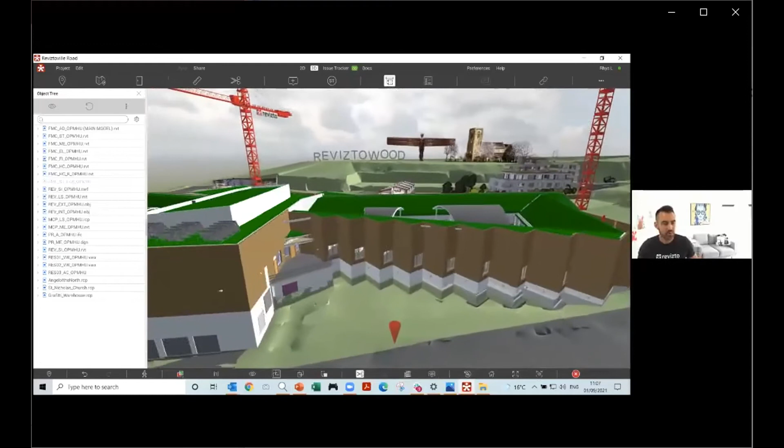So first things first, here's the Revizto application that's on my desktop, and we are also available on a variety of devices. So tablets of all sorts, everything you're seeing now we can take into VR, we can monitor all of the progress of issues or activities through a project via a web browser. 2 things that really stick out for me is interoperability and usability. Revizto really is that central hub to bring together a wide range of different file formats into an environment that you're comfortable in. So for me, it's important that we're able to bring together lots of different types of information, because that's what our clients are telling us.

On a certain project, they may have architects using Revit, and the engineers using Tekla or Civil 3D, IFC. We may have some point clouds if this is a project where we have some existing conditions that we need to take into account. And you can see here on the left-hand side, as I open up my object tree, the variety of different file formats that I have in here. So Lewis kindly created this project for me.

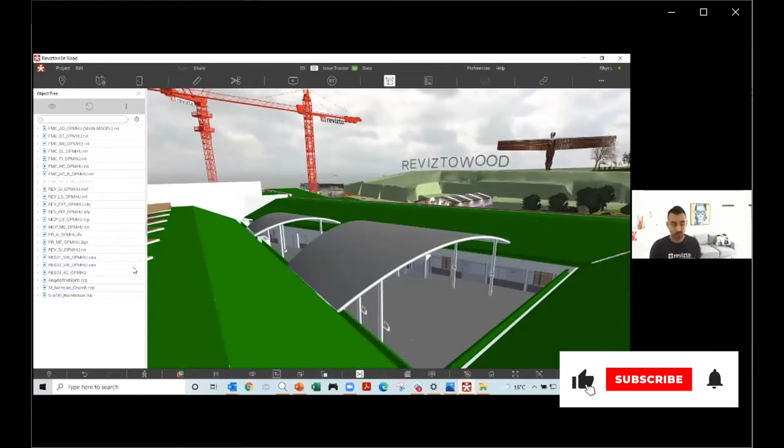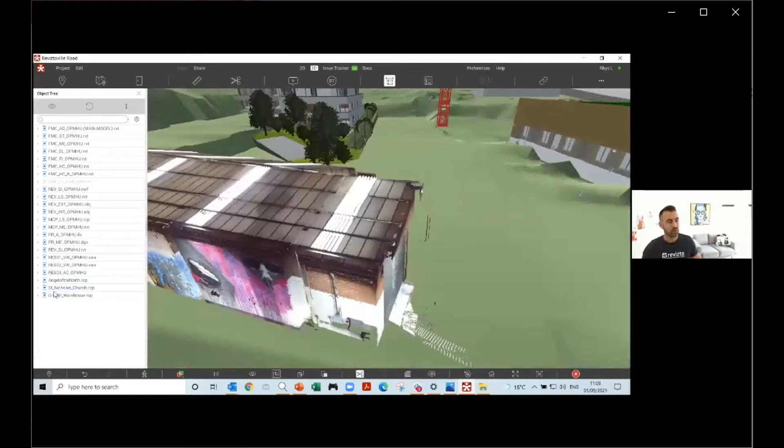So thankfully, I'm not going to have to jump into any of those technical tools today because I'm not comfortable using them. But using the gaming controls in Revizto, I can really quickly and easily start to navigate through this pretty large set of models here in no time at all. So it's about giving access to information that's not readily or usually available to everyone on a project in a rather unique way. So we can start to navigate through here.

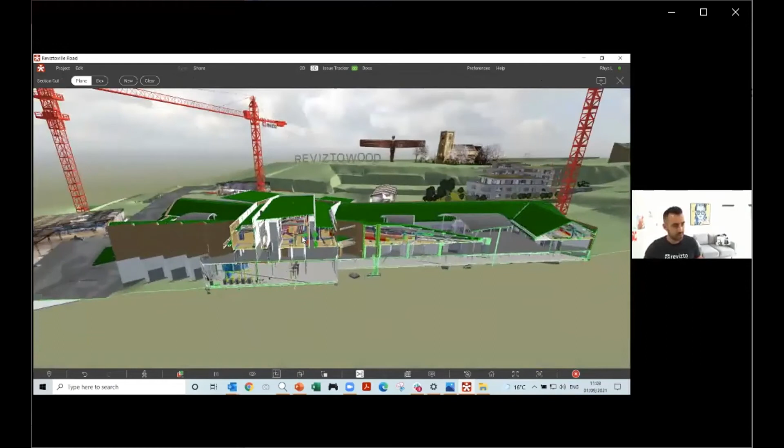Let's come back home, take measurements, cut sections. There's a variety of things that we can do here whilst we're in the project itself. So I'm going to take a section through this particular face, I can do that. I can jump down into this area and take a measurement should I want to. Let's just grab the ruler icon here, and that will open up my measuring tool. There's a variety of options. Actually, we'll just use the laser here.

And there's a number of reasons that I may want to do that. And in this 3D space, if I just hover over any object, you'll start to see that the metadata that's come through as part of the export is now available for me. If I double click, it'll give me all of the information about that particular object here.

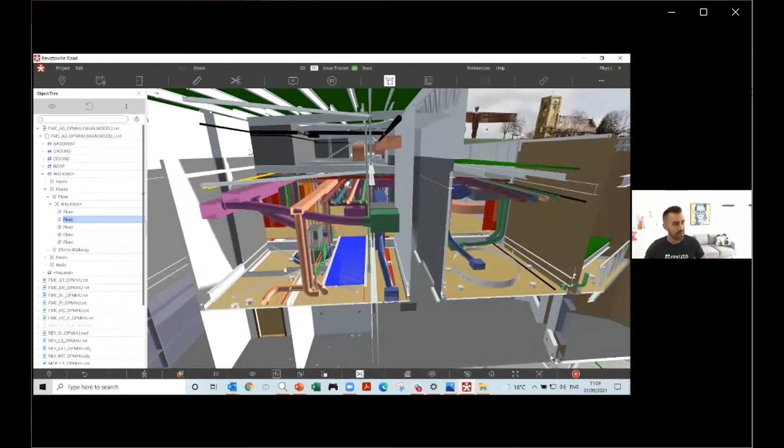So I can really understand what it is that I'm looking at, and then I can start to filter and search in a variety of different ways, now using the data, which is new to Revizto. If you saw our presentation last year, we could see this data, but we couldn't do anything with it. Lewis will touch on that a little bit more than I will. So we've got this space where we can look at all of this 3D information collectively.

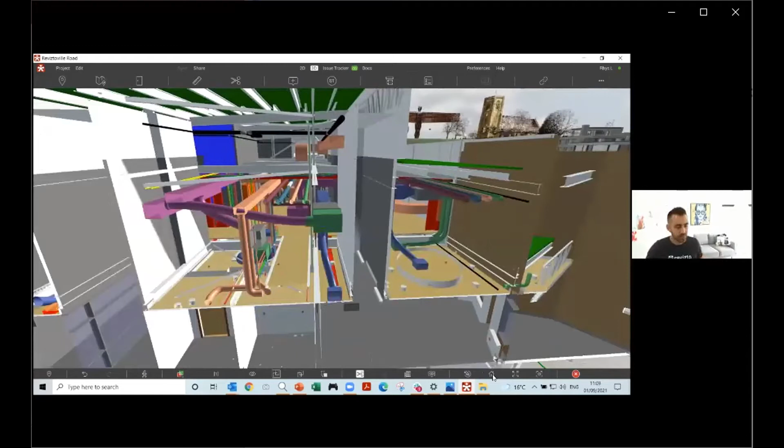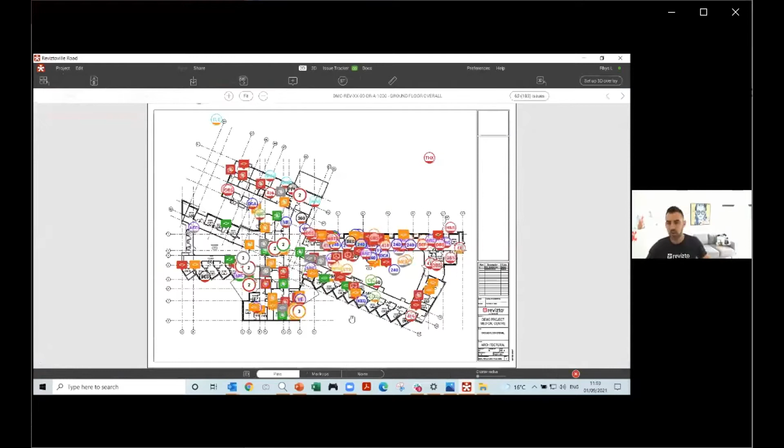What I want to do as well is just touch on the top here. If we take a look across the top, we're in 3D. We've got all of our 2D documentation as well. So here's a drawing with a live view of issues on this drawing sheet, color-coded by their status. So we've got drawing reviews on here. We've got clashes that have come through, questions from the client. All of these activities are now compiled into one place.

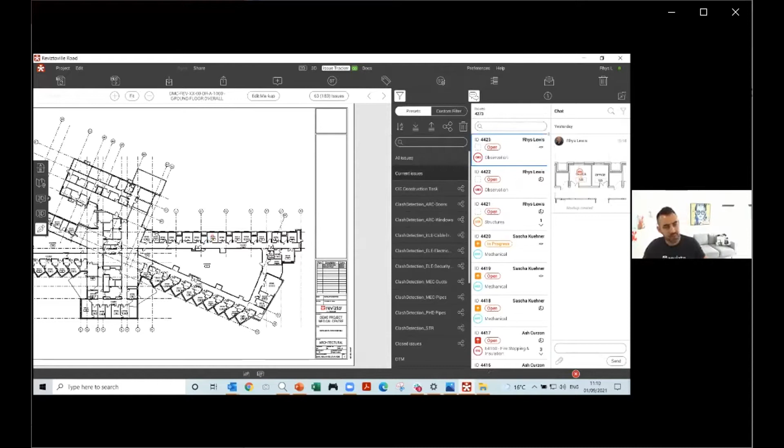This, our issue tracker, or as I like to refer to it, a single source of communication, a golden thread, that digital audit trail that so many of our clients previously were spending a long time trying to bring together, all of that information that's traditionally kept in project folders, various emails, PDF reports, BCF files, a wide variety that are not connected. Revizto really is the tool that can bring all of the project team together into one place so we can really understand what's going on, or more importantly, what's not going on.

So as I start to move down the issue tracker here, you can see there's a wide variety of varying issues here. This is me trying to be creative, but you can see they're all tracked, logged. We can see who the issues are assigned to, what they are, where they are, and all of this information is linked back to the authoring tool. So that's just a very quick top overview of the application itself.

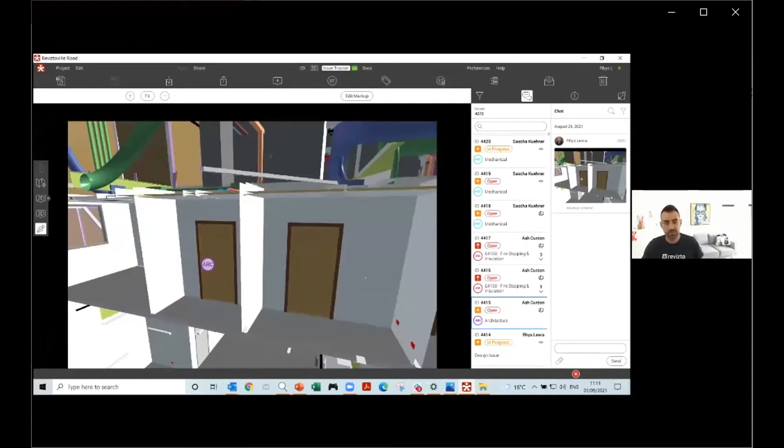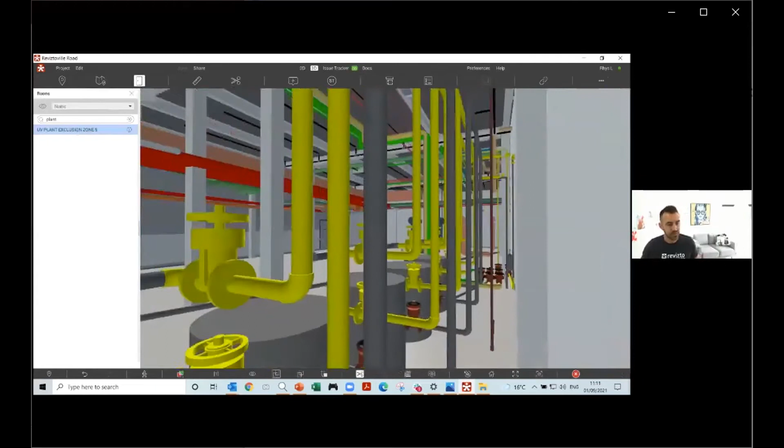What I want to do now is start creating some issues. So we'll come back to 3D and we'll jump to, let's go to a room. So I'm going to select the door icon there. Let's take a look in the plant room. So that's now going to take me directly to the center of that room. Again, using my gaming controls, I can start to navigate through into the center of that room. If I select the i icon, again, it'll give me all of the metadata about that room as well, should I want to do anything with that.

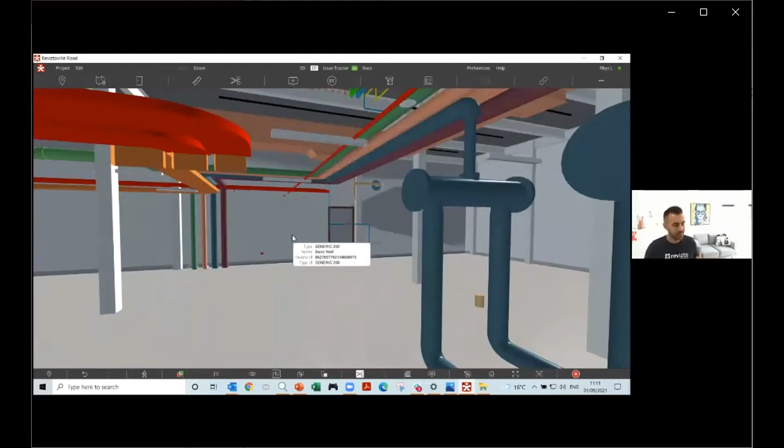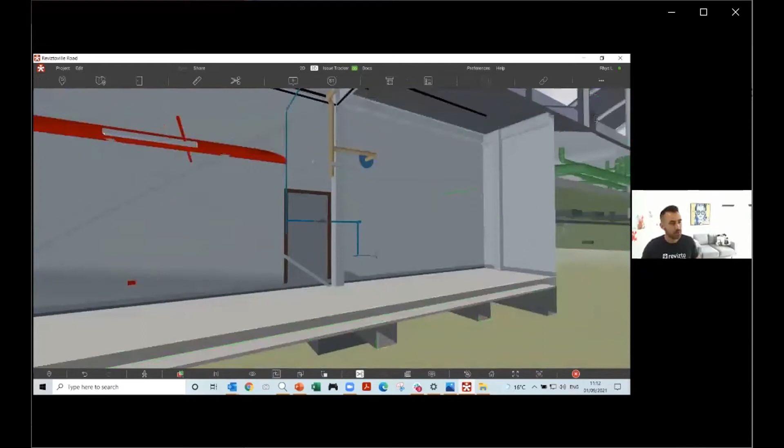Now, I've been in this room a couple of times, and I know there are a couple of things that need to be resolved. I've got my BIM wings on, shall we say, today, so I'm in fly mode. What I want to do is just slow the navigation down a little bit. So I'm going to click on this walk in person, and you'll see that slows things down quite a lot. I'm going to take my section tool, cut a section plane against this wall. There's clearly a problem here with this particular design. We need to move this pipe in. So what I'm going to do is create an issue.

Again, if you watched the session last year, you may remember that we just introduced stamps, talking about collaboration where you're comfortable. What we really want to do is help organizations speak a common language when it comes to issue creation or activity tracking. And the stamps really help us uniform that approach. So they're predefined issues effectively. And again, there's been a variety set up here. So we're seeing stamps being used for BIM coordination, construction review, design review, in the operational phase as well now, site reporting for snagging and defects.

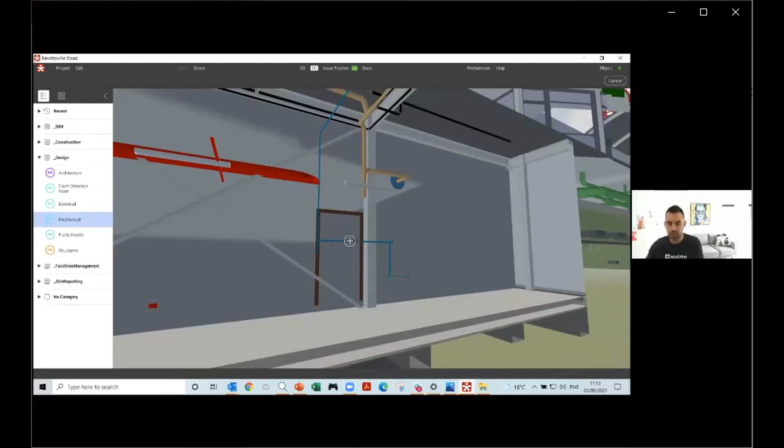So in design here, you can see we've got some predefined stamps for the different designers. I've got one here that's mechanical. So all I'm going to do is pick and place that stamp, and that now has been logged automatically in the issue tracker. So all of these fields here have been completed for me automatically. Just think about how you do this process today. If you are taking a screenshot, sending an email, marking things up and putting that into Excel, just think about how much time that's going to save your project delivery team.

And it's a single click for whatever type of issue that we want to create. So there's no confusion now if we're creating issues in a 2D space, in a 3D space, on my tablet or my desktop, the approach of creating, tracking and managing issues is the same for all. So we're all comfortable with how this should be done and that we're doing it in the correct way.

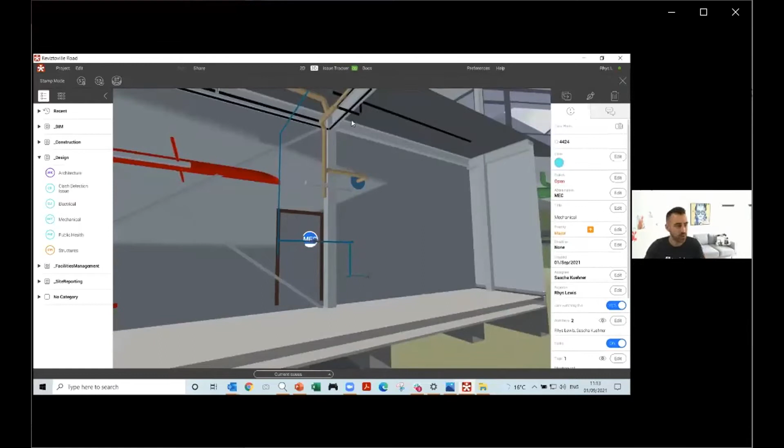Now, all of these fields here as well are being reported on, and I'll touch on that shortly. I just want to explain a little bit more about the issue itself here, first of all. So our issue tracker is based on the project's coordinate system, which means a lot. If I click on 3D here, the pen icon firstly is showing me the issue at the point of time that it was created. If I click on 3D, it'll show me where that issue is in the federated 3D view.

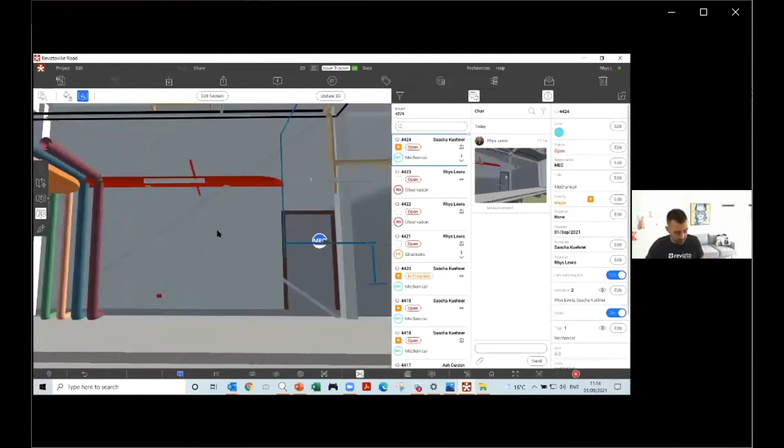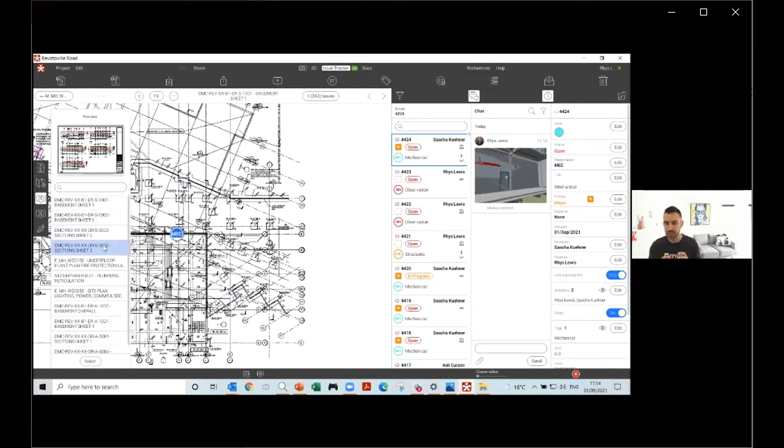Something that's very, very powerful in Revizto, what this now does is it's showing me what drawings are affected by that issue that I've created in a 3D space. In Revit, Tekla, ArchiCAD, or Revizto, it doesn't matter. All of these drawings now, I'm getting much more information about what that issue is. This we're finding for a lot of our clients is helping connect project teams closer together, because some are more comfortable working in 2D, some are more comfortable working in 3D. This bridges that gap.

So we've logged our first issue, and that's come in here. What I'll actually do now is this one is assigned to Sascha, our MEP lead, but I'll just assign this to Lewis for the purpose of today's presentation. So what happens now, Lewis will hear a ping, he'll be sent an email, and within the issue itself, we can start to communicate. So I can say, hey, Lewis, please review this. Click send, and that's now been logged here in the chat log effectively.

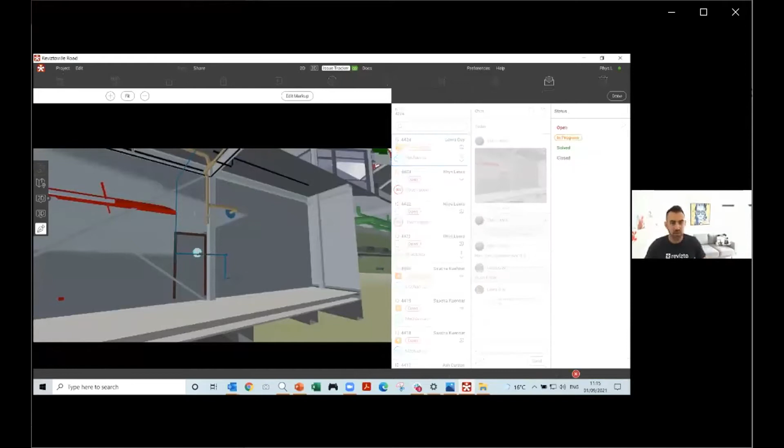So Lewis can come online here and do a number of different things. He can chat back, as he's done here. So, okay, on it now. He can then change the status to in progress. What he can't do is mark the issue as closed. That's my job. So I'm going to review when he's marked that issue as solved, and then come in and actually close that out or not. And then in here, we can add a variety of file types.

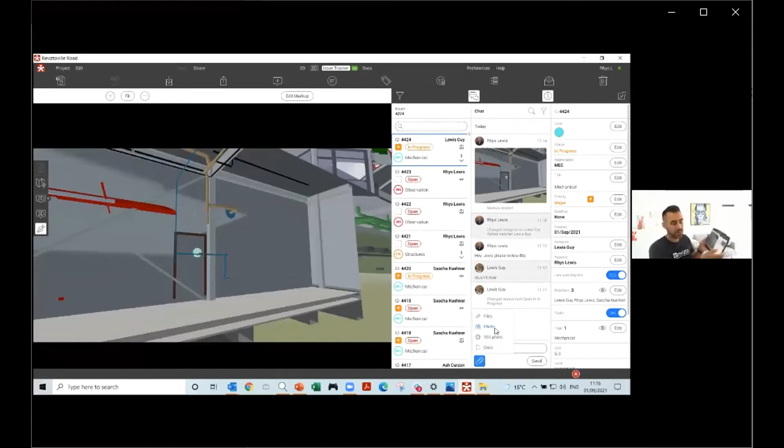So if we're out on site, what I'll do actually on my tablet, as I've got this in front of me. So the application is exactly the same on your mobile device. As we're on this topic, I'll just take a picture of the door now, which is my home office. Just to add a little context to what we're saying here, I'm out on site with my tablet, connected via my phone, actually. And important to mention, we don't need an internet connection for that to work. Everything will sync when we have an internet connection restored.

So one thing I like to refer to is, connectivity shouldn't affect productivity. Revizto allows you to work out, give access to your field team, give them access to models and drawings, and still continue to work, regardless if they have a connection or not. They just need to sync that project before they head out. So that could be a variety of different types of issues, but you can see it's been logged, assigned to Lewis. We've got a real-time communication feed, and we can attach a wide variety of different file formats here, pictures, supporting documentation, and so on and so forth.

Now, if I had this particular project open in Revit or Navisworks, then I'd be able to switch back to that view, which Lewis can show in a little bit. I just want to create a few more issues because we don't have too much time today. So that's the process. I'll pull up our dashboard in report as well so that you can see that. So I click on my reporting icon. This will open up my web browser. Again, on my phone, if I want to. I can create a wide variety of reports into Excel, PDF.

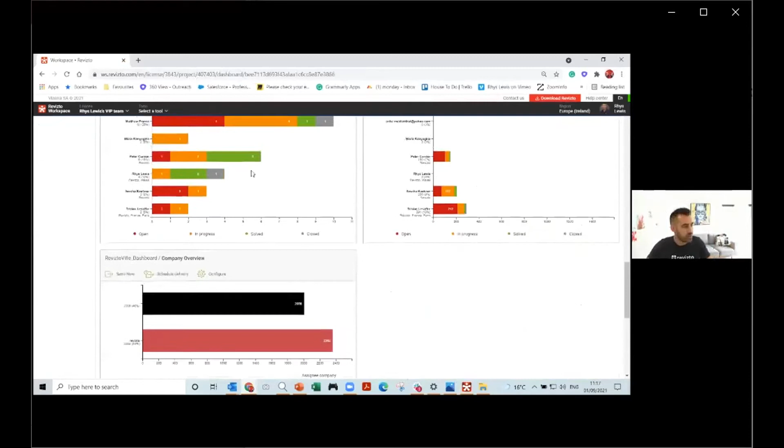I really like these dashboards that give us a really insightful overview instantly about how the project team is performing. And all of these charts are customizable. So I'm looking at structural, which one is that? Structural clash, issues in 2D, who's creating them and the status of them, and so on and so forth. All of this is absolutely customizable to work in a way that suits you. So now let's jump back to the 2D.

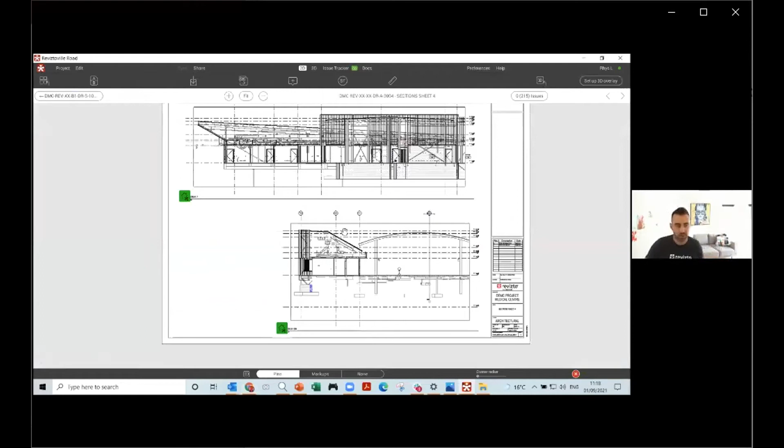And if I just come to the top here and select one of these, I don't know, let's go to one of these sections. I quite like looking at the sections. This is a great way to show this feature where we can overlay the drawings on the model. So these drawings may have come in from ArchiCAD, and we've got some Revit models, as you've seen in the background. These links work here, so we can jump around sheet by sheet.

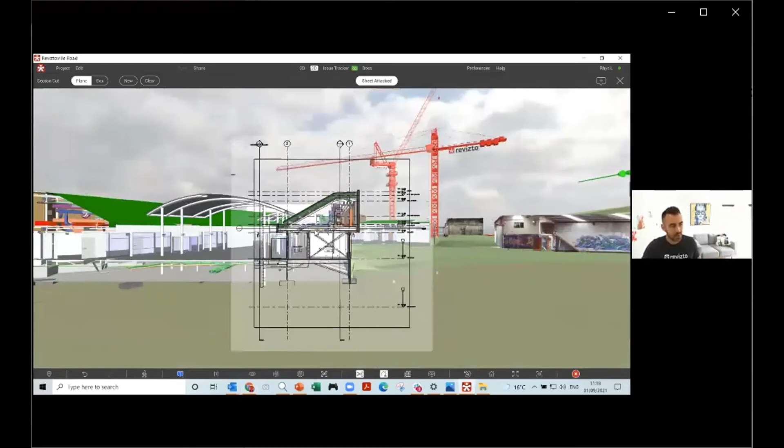But what I really like is the ability to do this. So these green icons have appeared on this sheet automatically. I'm just going to click on that green icon, and that now has overlaid that section detail in place for me automatically. So talking about being comfortable, a lot of people that we speak to are more comfortable in 2D or 3D. This again helps bridge that gap.

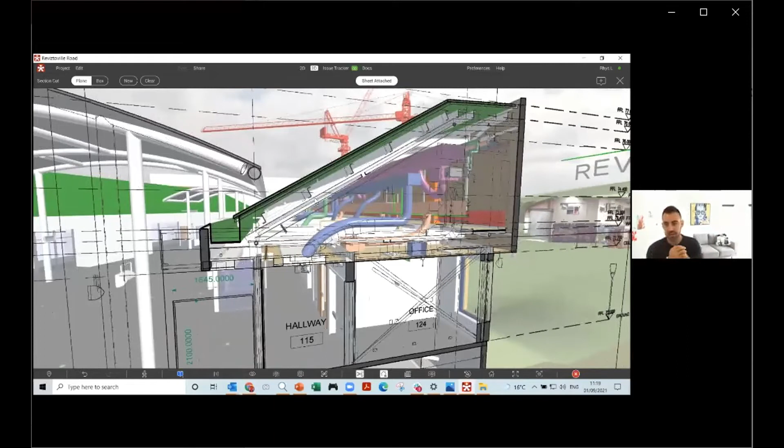So there's two things for me. It really helps with communicating what that detail is and if it's going to work, but really assists in coordination where you do have different consultants using different tools to do their job, which is fine, right? And Revizto really helps to tighten up that coordination process, and we can understand the buildability of this particular project by being able to do this.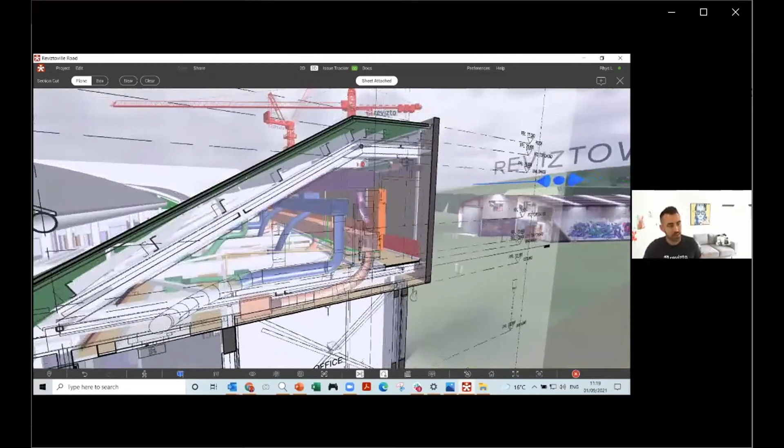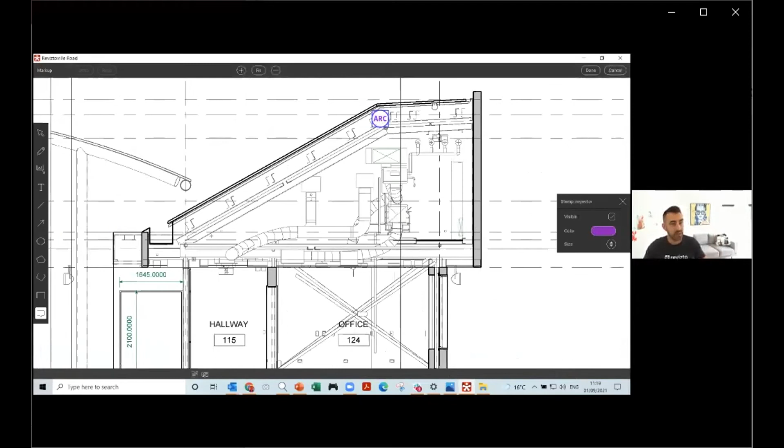And again, if we position a stamp on this drawing sheet, let's come back down. We can see all of the issues on this sheet, including clashes here, which is great. I can come in, pull up one of my stamps. Let's go with an architectural one. Maybe there's something up with the roof in this particular instance. I can come in and we've got a variety of markup tools. So I can just grab my pen here. Ooh, not that one. Let's undo that. And let's go with this, what I wanted.

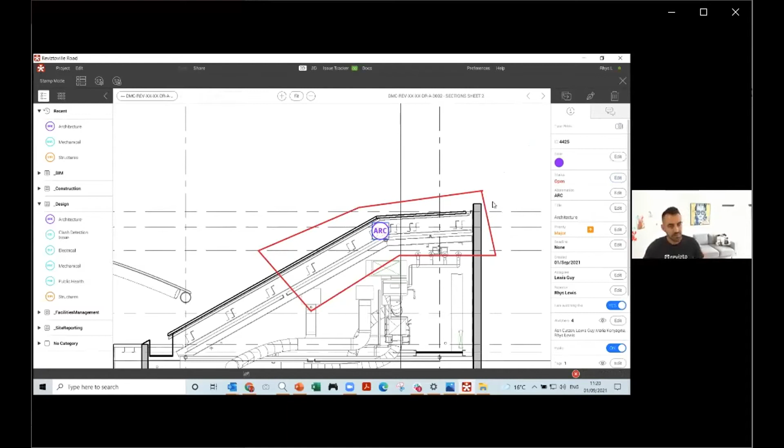Click done. And again, that's been logged to Ash in this case, but we'll assign that to Lewis. So I can really start to speed up this process now. So as I'm jumping around, that's been logged in exactly the same way as the other issue was logged. Something that I also quite like, especially for site teams, is we've got this jump to 3D. So if I pick and click, that will take me directly to that space in 3D.

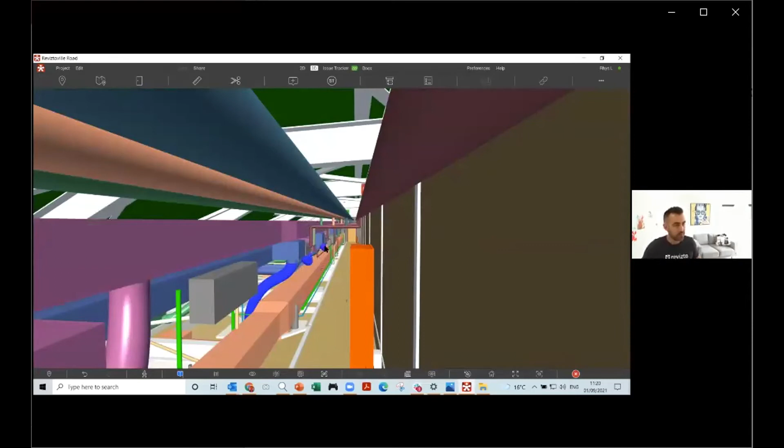Let's come up here and position down a few more stamps. So maybe I want to select this object, that object, and that object. And pull out a stamp again. My mechanical stamps are in my recently used. Pick and place, and that's been logged in exactly the same way. So no matter where you are, in what system, if it's, again, 2D, 3D, Revit, Revizto, Tekla, ArchiCAD, MicroStation, the issue creation process is exactly the same way.

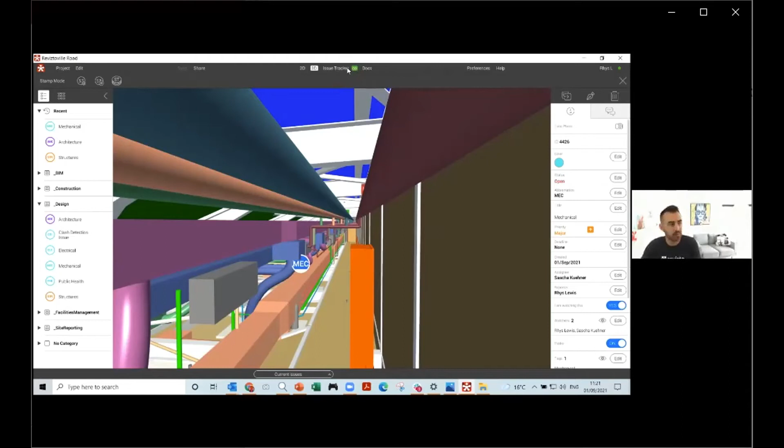The stamps just make our lives a little bit easier, which would be nice, right? It's all about gaining efficiencies and saving time. The stamps are a great way to allow us to do that, and everything is monitored and tracked in real time in Revizto, so the team can be confident and comfortable things are moving at a pace that we're all happy with. And everything I've created today, 3 issues you can see have been logged here with all of the other activities or tasks from the whole project.

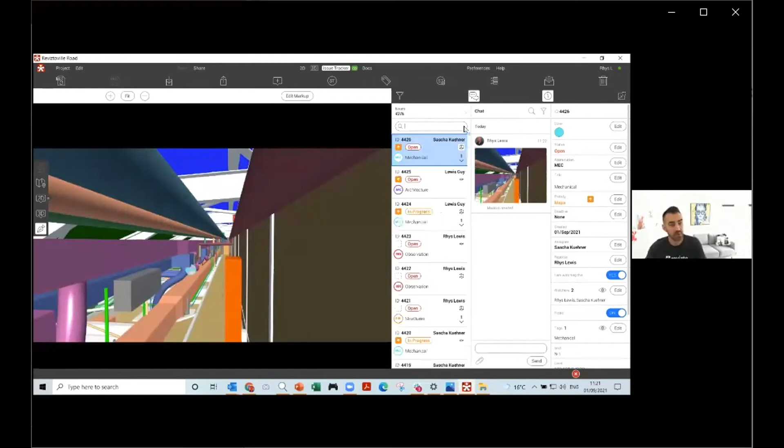Before I hand across to Lewis, I just want to touch on this particular example. So you can see I've got 4,000 issues in here. Our issue tracker can be used almost like your Google search bar, but I've got some preset views here. I just want to show you these few examples that are good use cases of how clients are using Revizto. That's reduced the list to 6.

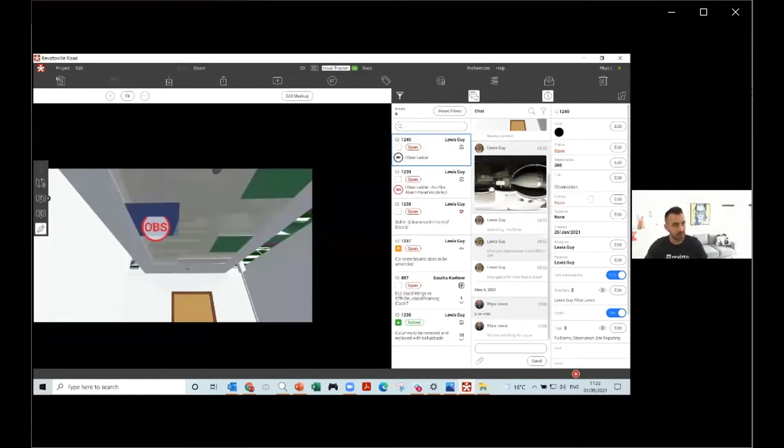But if I just go down the list here, you can see somebody's used an observation stamp out on site and taken a 360 image. Maybe this is for as-built verification or just a survey. Somebody spotted something out on site that's been installed that wasn't modeled. Let's get things updated. We've got clashes that have come in from Solibri and or Navisworks.

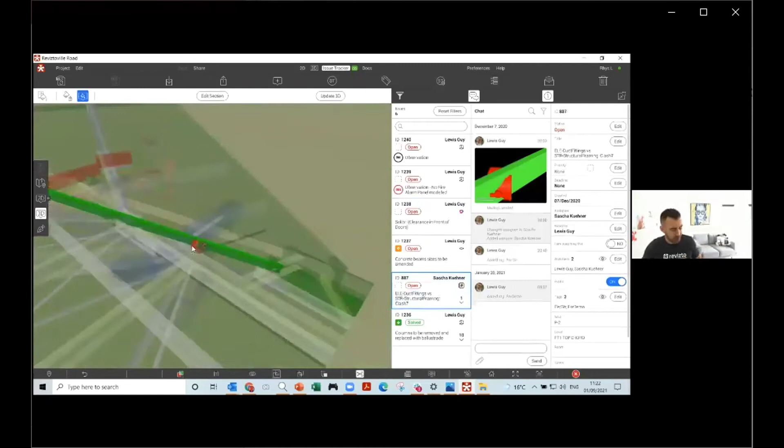Now this is great because for me, I'm used to seeing these types of clashes in PDF format. We can start to really understand what and where that clash is. We can change the view. What I really love is we can now see where that clash is in 2D. And I know some of our contractor clients that we work with can now go through their projects level by level in 2D, reviewing only clashes.

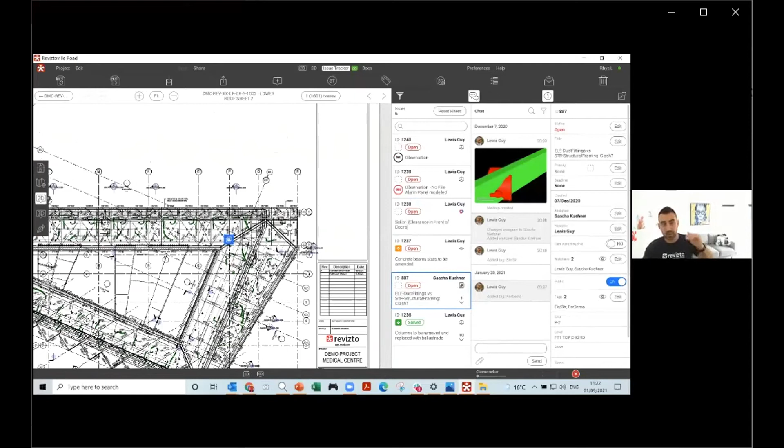And then this is another great example where we've captured full history of that particular issue. So we've always got an audit trail of this. This can't get deleted. We can see that the client there wanted these columns to be removed for the glass balustrade.

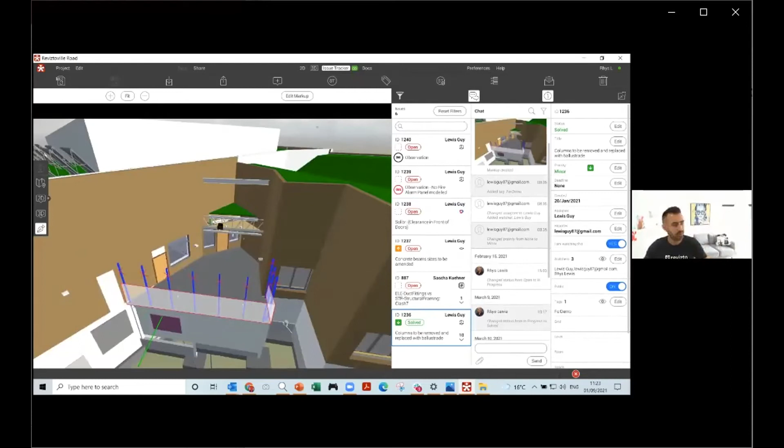So we can set up an export scheduler that's pushing information into Revizto at a time that suits you. This has been marked as solved by Lewis. So for me to view the most up-to-date information, I can click on 3D or 2D, and that will show me the latest version of the model. We can see now actually that balustrade's been updated. Fantastic, so I can come in here and close that out.

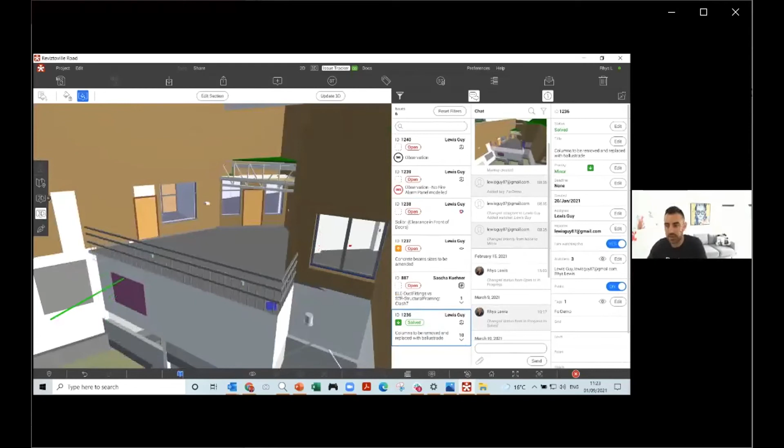Yeah, perfect. Thank you. So Rhys was sort of alluding to the collaboration that we can do through issues that we're raising and how we can communicate with each other. But collaboration doesn't just have to be that. It can also be the way in which we can help people who are not necessarily as proficient in these sort of applications.

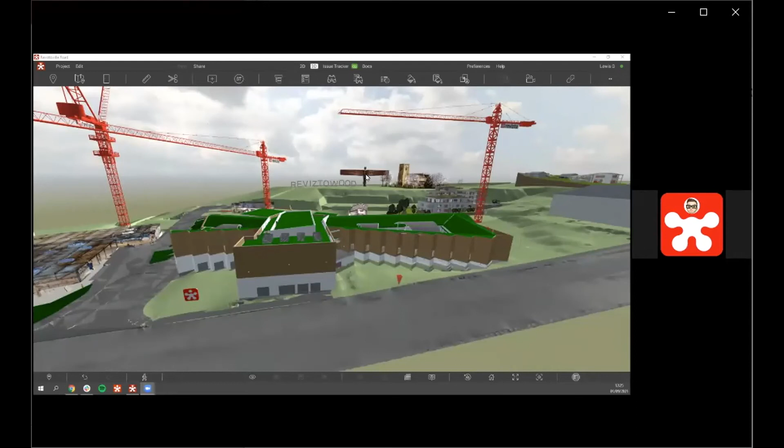What we've seen in the last year, especially since Revizto 5 came out, we've got a lot more non-technical people getting involved in Revizto. So we've always had design managers, construction managers, those sorts of people using Revizto and gaining the benefits from the issue tracker, as Rhys was showing. But we've seen a lot more users now with people like the QSs on the project, people who are tracking changes and trying to work out what's the total length of pipes, what's the total volume of concrete. These guys and girls may not be the most proficient at creating the information, but Revizto allows anybody in the project to go in here and set this up.

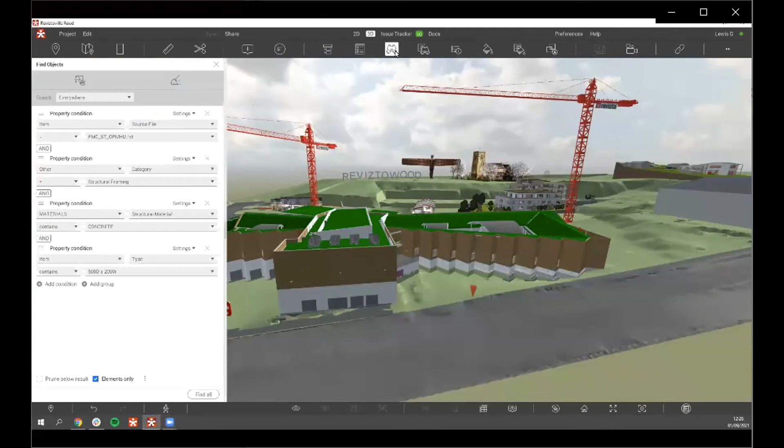So, for example, I've got my find objects here. I can add some conditions, so we can say property condition. I can search for the data that I'm looking for, so I can say system classification, for example, and we can say cold and hot water. That's perfect. I can add some more rules in here if I want to.

So I can use this to get rid of some objects. They're going to give me kind of a false count. So I'm going to say does not equal, and I'm going to type in insulation here so that we can get rid of the pipe insulation. And I'm going to add just one more in here that just shows me which file it comes from, just so that I can be specific. So we can just say this is from the MEP model.

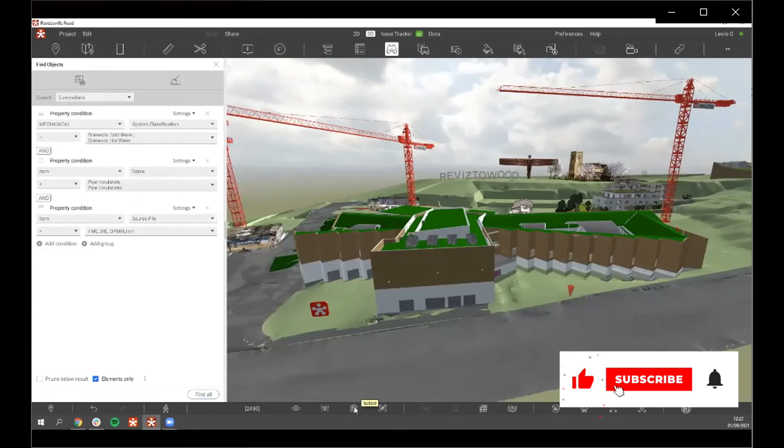So I can now find all. I can see that it's selected 2,490 components, and there they are now kind of isolated. This can be saved as a search set. So we can just say cold and hot water. And I can say okay, and that now creates that search set for me.

I'm technical, I can do this with great ease, it doesn't really take me any effort, but if we want to make this available to other users now, what we can do is we can just take this into one of our folders. I'm going to drag this into my MEP folder, and this MEP folder has been shared, so everybody on the project now has access to this information.

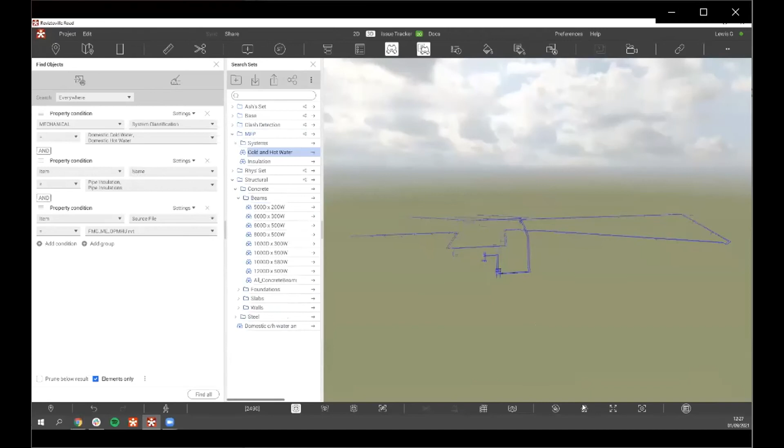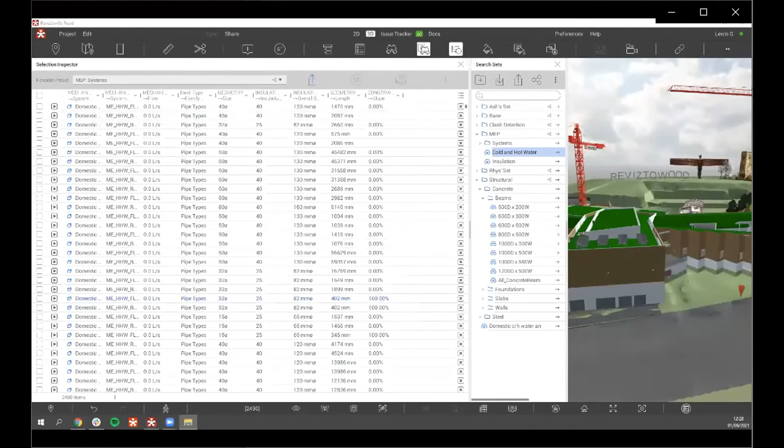And this is really good because, as I said, the QSs on the project, they can now just open Revizto. And they can just go to the search sets. They can just select the search set that they're looking for. And then they can see it listed off now in like a list format. So we can see every kind of instance. We've got 2,490 here. And I can now export this out to Excel. We can just call this cold and hot water. And I can save that. That's already created it. And now we can open that in Excel.

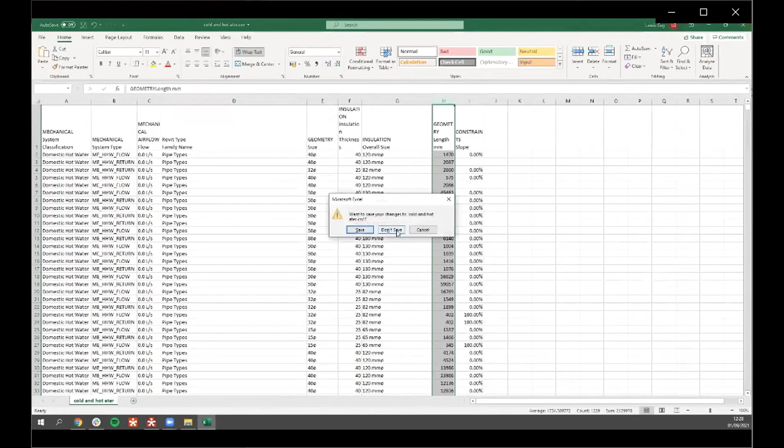And now, again, the QSs can now use this information. They've got the total length of the cold and hot water pipes. They understand what the insulation around it is. They've got all that information, and it's really easy for them to extract it out and just use it. Whereas previously, they would have to come and ask someone, maybe from the BIM team or someone they know who is experienced in getting this information out of the application. Whereas now it's literally 5 clicks for them to do it themselves, and they can update this whenever they want. So it's really good that we can give it to the technical people to create and then share it with the whole team, and then they can use it for whatever purpose they want.

We also have a similar thing here when it comes to viewing the models.

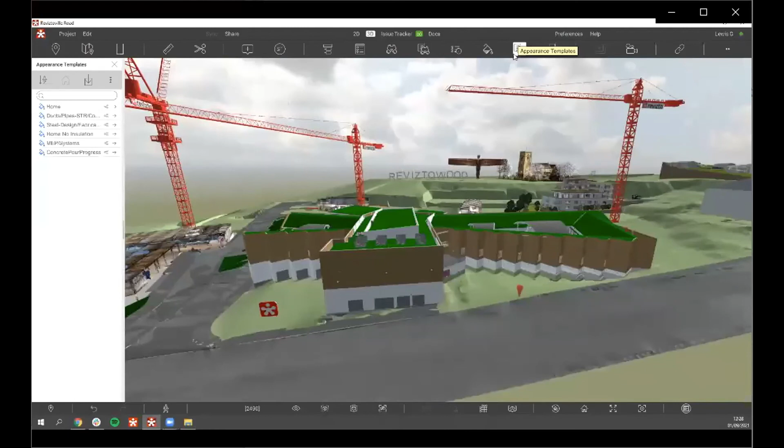So we can create appearance templates, and the technical people on the team can do this in a way that makes sense. I can fly through the model, and it might be that we want to understand what the MEP systems are doing on this project. So I can just activate my MEP system view that I've created here, and what this does is it automatically updates the colors.

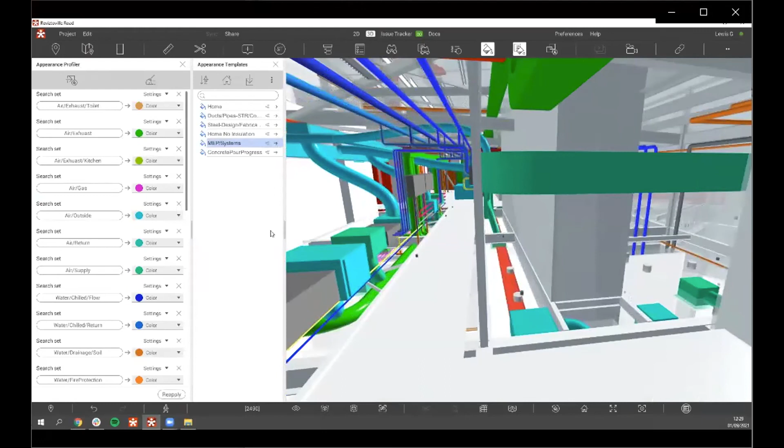It's made everything else white, and it's made the MEP systems colorful, as you can see here, with all the colors down the left-hand side. This makes it really easy for people who are either still new to 3D environments, or just people that want a better understanding and be able to visually see exactly what something is. We can look and see this green color here, so I know it's an exhaust air duct. This makes information instantly accessible to people.

This is collaboration, but not direct collaboration. It's allowing people that are proficient in this to create things and share it with the wider team and make this available.

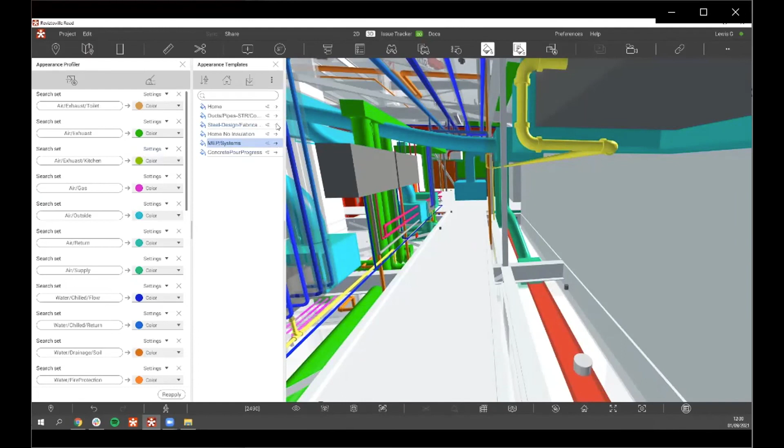Another good example, we can switch to design and fabrication models. When we've got a fabrication model that's been shared with us and we've got the design model, just by color coding, we've set one view to be solid green and one to be transparent red. You can instantly see this, and it allows you to visually review. So here I can see an issue where we've got beams out of alignment.

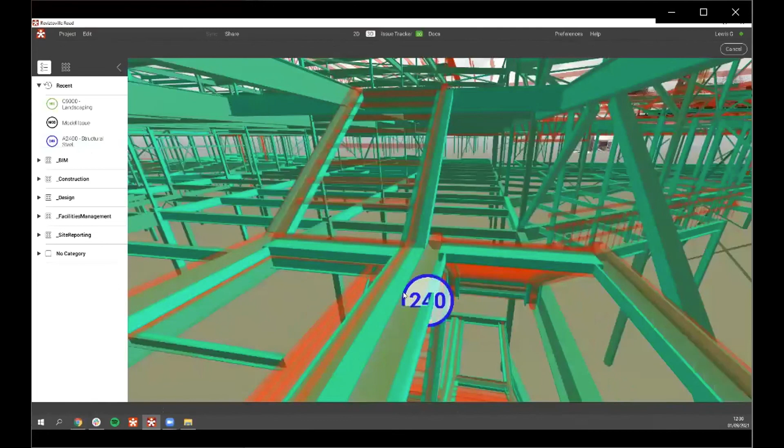Straight away, we can go to our stamp tool, exactly as Rhys showed us before. I've got my structural steel one, I can click and place it. Now we're collaborating in the issue tracker through a view that's been set up by other people on the team.

Revizto 5 is really allowing you to do a lot more of this cross-discipline working, allowing people on the project to create views, create settings, create the way that you're going to use the project, and then anyone on the project can take advantage of those, saving everyone an awful lot of time. Straight away you can go into the issue tracker, communicate with the right people, then get back into your model and fix it. Everything is done a lot quicker than it would have been done previously.

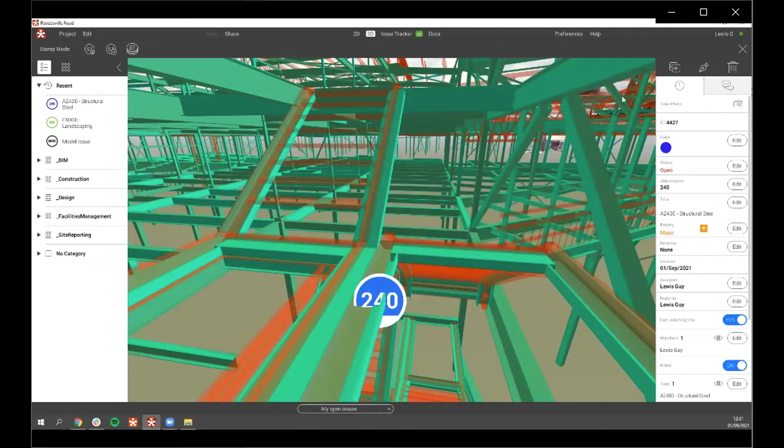So yeah, just a very quick overview on some of the new features in Revizto 5. It's going to save you an awful lot of time.

Great, thanks Lewis. It's always difficult to show you absolutely everything in a short amount of time, but hopefully that's given you a flavour around how Revizto can really help aid in the communication, coordination, and collaboration process in your projects, regardless of what stage you're at. Talking about the interoperability I mentioned at the beginning, but the big thing and the topic today is usability, or being comfortable with collaboration.

I'm really passionate and believe Revizto can help any organization, any project of any size to become more efficient at the way they deliver their project. Buildings, infrastructure - we've seen a wide use case we've not been able to touch on today, the point clouds, the infrastructure examples, but you can get more information by getting in touch with us directly, or just go to our website.